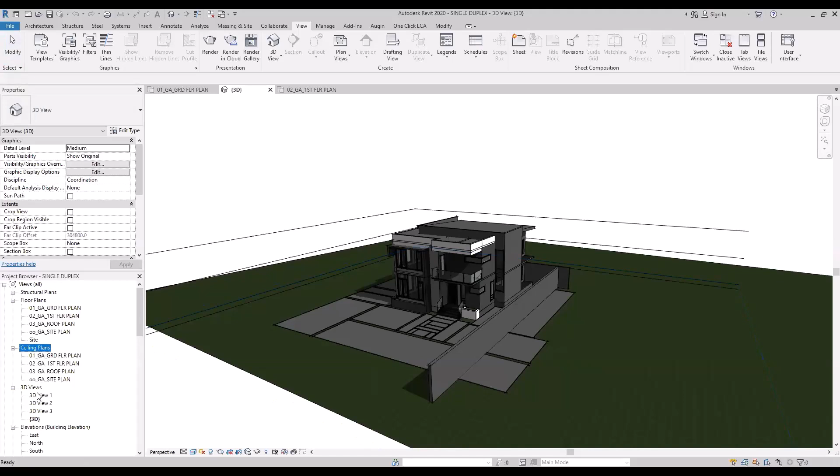So what I was saying before, this is your Revit platform here, and you have your 3D when you upload models on Revit. On your left hand panel, you have the project browser. On your project browser, you can see your floor plans, your ceiling plans, your 3D views, and your elevations, which are north, south, east, and west.

So just like we are familiar, we know that normally we always have different pages of drawings. This is just similar. So let's say I want to check on my ground floor right now. I'll double click on it, and I can zoom in and zoom out. I can see that this is the kitchen, which is 15 square meters, the bedrooms, the dining rooms. Same thing, I can do that for my first floor. So this gives me a basic knowledge about the drawings, which we are all familiar with.

Same thing about the roof. I can see my roof. And also I mentioned earlier on that if you want to check the 3D, there is this home button here, which is like a little house. You can toggle on it to check your 3D mode.

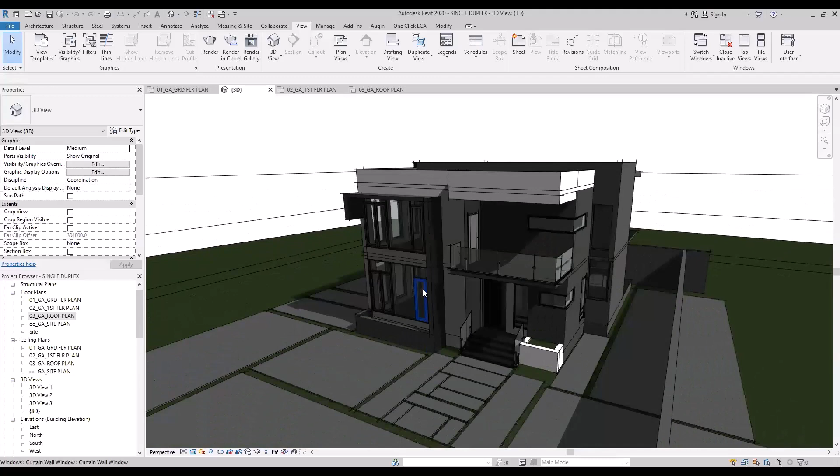And I also mentioned that if you want to check around your buildings and scroll in and scroll out, you can use your scroll button. And if you want to go around your buildings, you can always use your shift button and your scroll button to go around. So this gives you a proper view of your buildings.

Just let me check if there's any questions for now. Please go ahead. Okay, thank you.

Okay, so that is Revit in little terms. But sometimes when I'm doing MEP measurements, I always like to do it on Revit. So how can you do measurements? How can you do a little takeoff on Revit? Because I started using Revit for my takeoff before I was using Navisworks. It's not really a takeoff tool, but it helps in creating something called schedules.

No software, Revit or Navisworks, can prepare bills directly for you. They can help you get a major aspect of your bill of quantities, which is the quantities. Every consultant and contractor has their various rates, and anybody can defend their rate. But the thing that should be constant in any arbitration or case is the quantities, because length times breadth is still going to give us square meters.

So let's say I want to quickly get my schedules, my floor and wall areas from this model. It is easier than deducting corners, T junctions, openings and all those things, to avoid all that stress. That's why 3D helps you get your quantities faster. So let's say I want to get it right now.

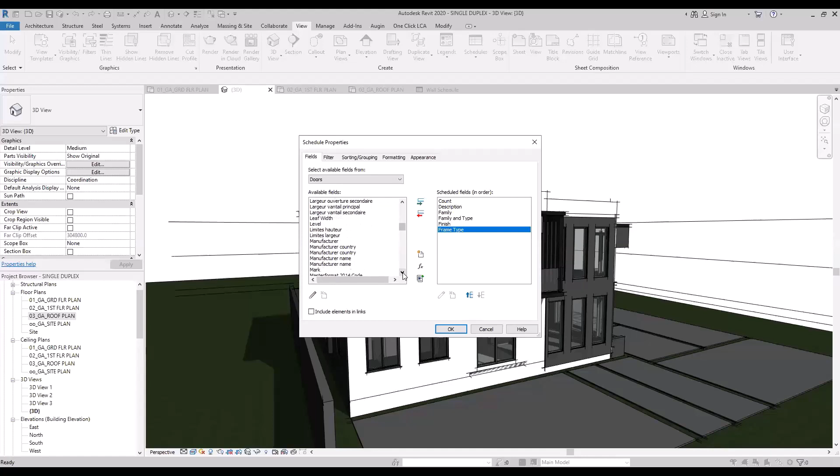Yeah, I'm looking for description. I'll be looking for the family and family type. So that is basic. And probably you have the finishes, depending on the level of development that is being given to you by the architectural teams. So let's say, okay, frame type, let's say if we have any. Okay, that's basically about that. So I'm not wasting much time. So let's click on OK here.

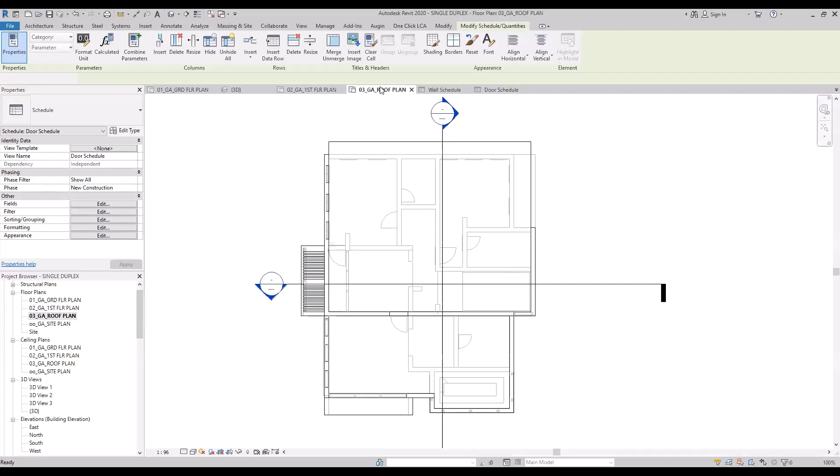So that's basically about how you can use Revit to get schedules out. But our focus here now is going to be Navisworks. And also if you want to convert Revit to Navisworks, you need to ensure whatever versions you are using, because of how Autodesk products work. If I'm using a 2021 version of software, and you as an architect gave me models of 2020, I'll be able to open it, which is okay. But if an architect is using 2021 and you as a QS are using Navisworks 2020, you will not be able to open it. So whenever you are trying to toggle between the two softwares, you need to have the same version of softwares.

So now let's just move to Navisworks. I've already opened Navisworks, and it's just a simple step. If you want to put new drawings, new models on your software, you just come to new here, just like Microsoft Word, come to open, and go to the location where you have any of your models. So we are using a simple model here, which is a proposed 2-bedroom flat. This was a real project in Lagos, actually. So you click on any of the models, and I can also share some of these free models at the end of this class for learning purposes. These are models I've been using for training for some time. It's free, actually. So you click on it, and you open directly.

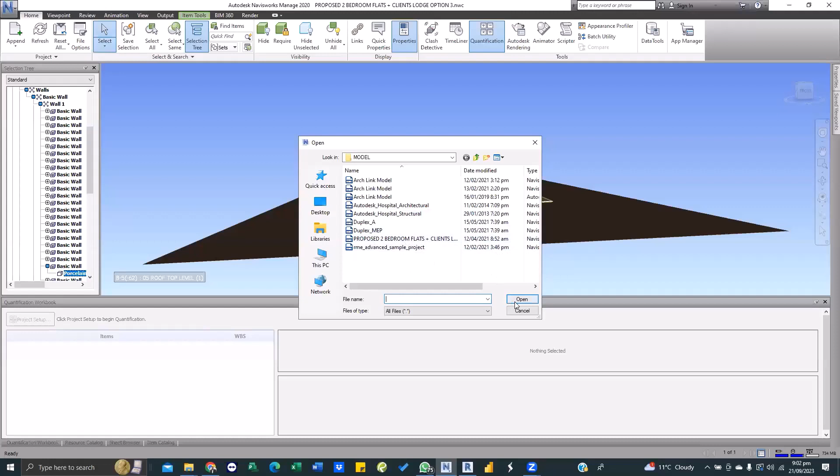I really appreciate it. Okay, so like I mentioned earlier on, this is Navisworks. When you want to open models on Navisworks, it's just like our normal Microsoft Word. Go to your home at the top left here, go to open. When you click on open, you can see a lot of models I have here. Actually, these are something that I've worked on. I can send some of these to you, like I mentioned earlier on. So this is a simple proposed 2 bedrooms. You click on it and click on open. It will bring a page like this for you.

So when you bring a page like this, one thing I like about Navisworks is it's more unique for measurement than Revit. So that's why it's very cool for quantity surveyors. So now on Navisworks, we have a lot of important panels for you, and we have a lot of less important panels here. So on this particular place here, this is the home, and under the home you have append, and on this append, probably you can be seeing something online they call in a BIM project.

In a BIM project, you can see something called federated models. This is where it all happens. Now this append function just means combining models together. When you run clash detections, you need to append your models together. Simply put, that means to join. When you join all those things together, it becomes a federated model. So you can always do that here.

Like I said earlier, we need to expand our mindsets, expand our horizon. Quantity surveyor does not just limit to residential and commercial. There's a lot of things we need to open our minds to in order for us to be internationally competitive wherever we find ourselves, because the world is more global and there's a need for us to expand our mindsets.

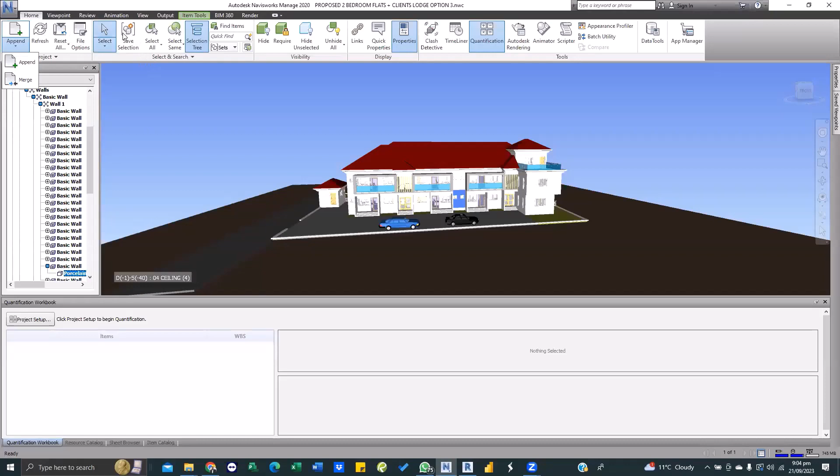So also I'll be talking about the major tools here that are very important for us. When you talk about select all here, and select same here, as time goes on you'll be saying if I want to just see all my walls alone, I don't want to see anything outside the walls, I can use this select.

Okay, someone is saying something. Okay, still the same thing, just want to be sure.

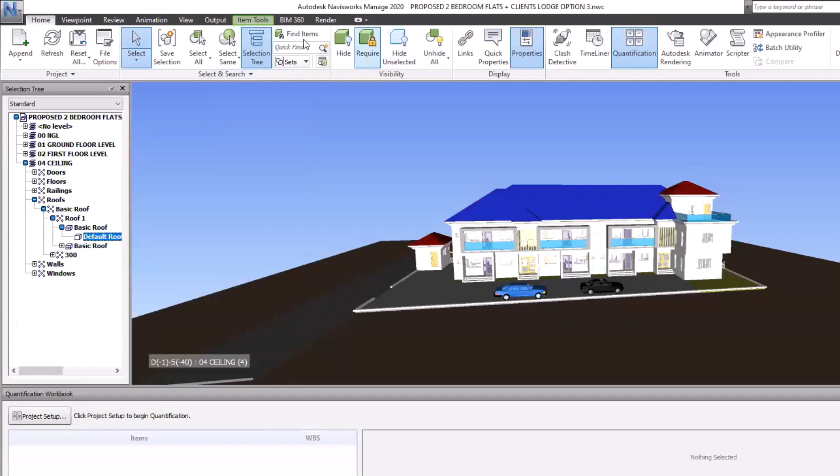So when you talk about select same here, for example, let's say I want to see my roof alone in this building. I can just click on this roof, select it, select everything about the roof, then hide unselected. So this is everything - this is my roof here. I can see this is how my roof is, these are my eaves. This is actually how my roof is alone.

So let's say, for example, you want to go back, you can say unhide all.

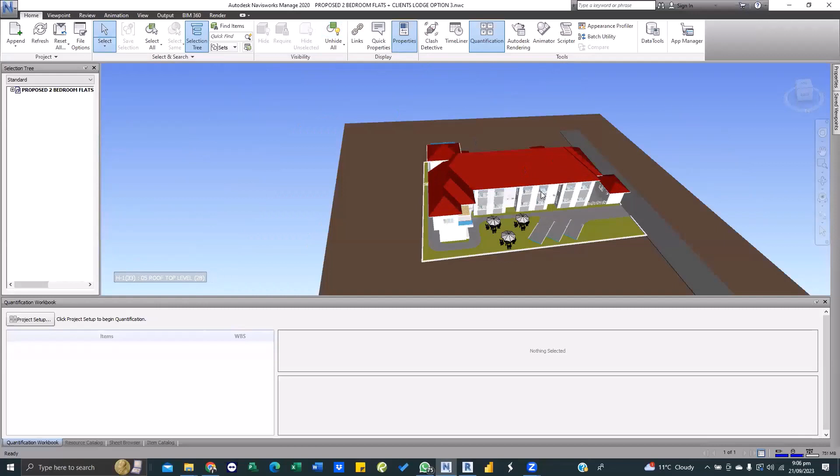Let's say, for example, I want to see my block wall alone on this particular building. So I can select one of them - you can see I'm only selecting one of the walls - and I say, okay, select same. That means select all the block here. So it's selecting all that type of block, which I think is the internal walls. So I can say select all, and I deselect it. So I can say that this is all my internal walls.

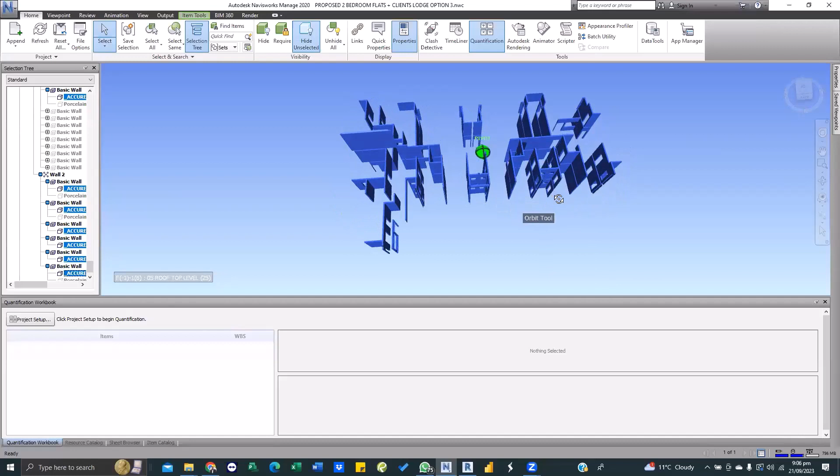This will be very useful to you when you are doing a large project, because no matter how you want to visualize your internal wall, you would not take your internal wall and your external wall together when you are doing your measurements. So that is the meaning of selecting, that is how that is.

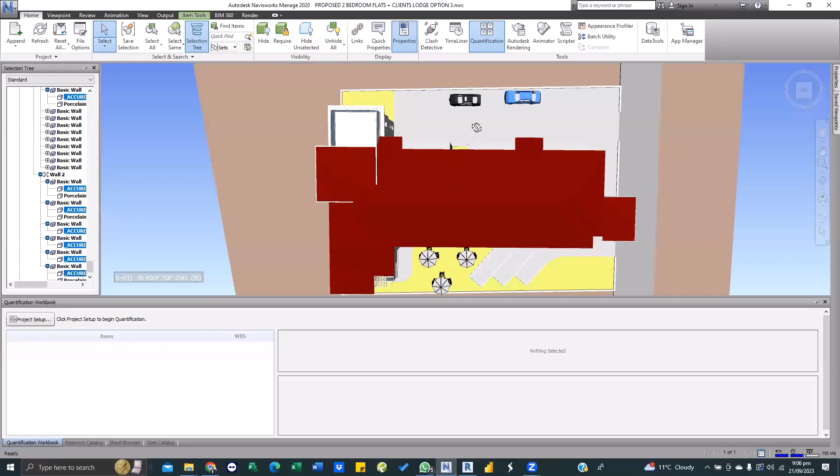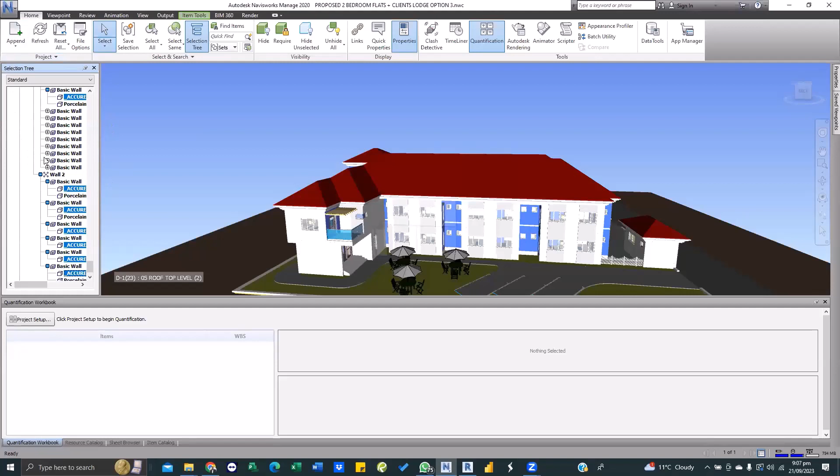Okay, now also selection tree - it is very, very important. As a quantity surveyor interested in using Navisworks, when you get a model, you need to first look at your selection tree, because this panel here is what they call the selection tree. And the more detailed your selection tree, the easier for your calculations, the easier for you to understand it. Let me expand this, let me close this.

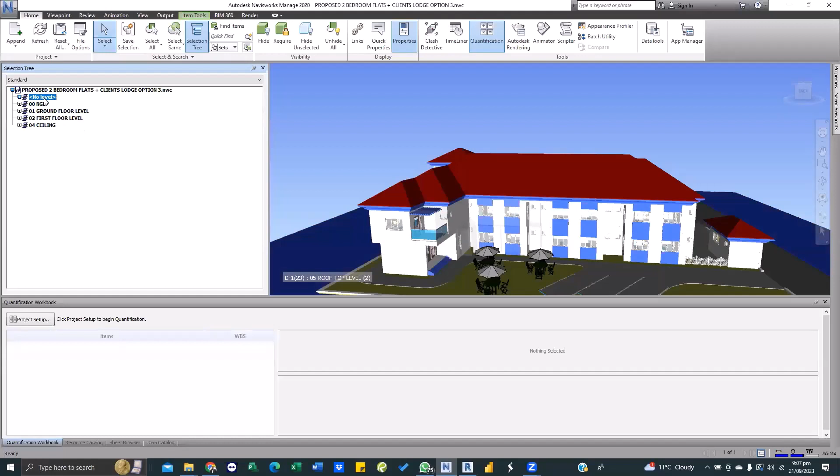Now you can see this is my root for my selection tree. I have proposed 2 bedrooms. I have some information on levels, on ground levels, on natural ground levels, on ground floor, on first floor, and on ceiling.

Now I always tell people that once I get models, I make sure I click on the levels. If, for example, I'm clicking on ceiling now and I'm seeing something highlighted in blue probably in the gatehouse, I know that probably when doing the design, those levels on Revit are not well done by the designers. I'm not a designer, so that is why a QS needs to prepare what they call a BIM execution plan. BIM execution plan is just like a document that shows what you'll be needing in order to execute your BIM project.

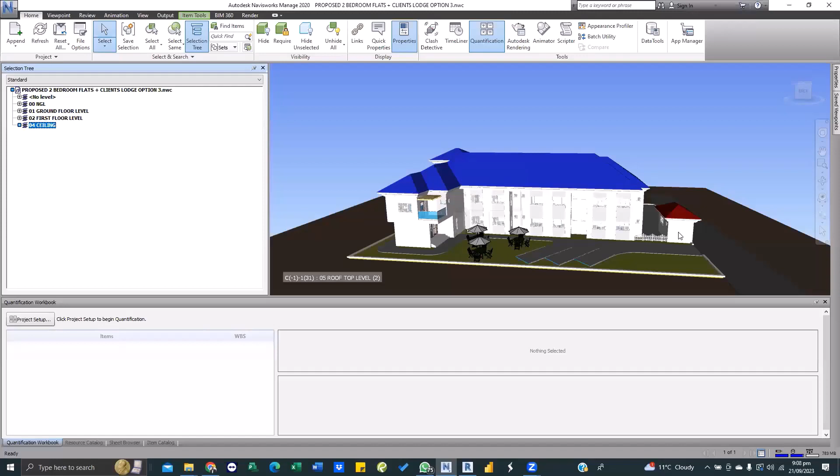Okay, so now looking at this, when I click on my ground floor, you can see everything that is on this ground floor is highlighted blue.

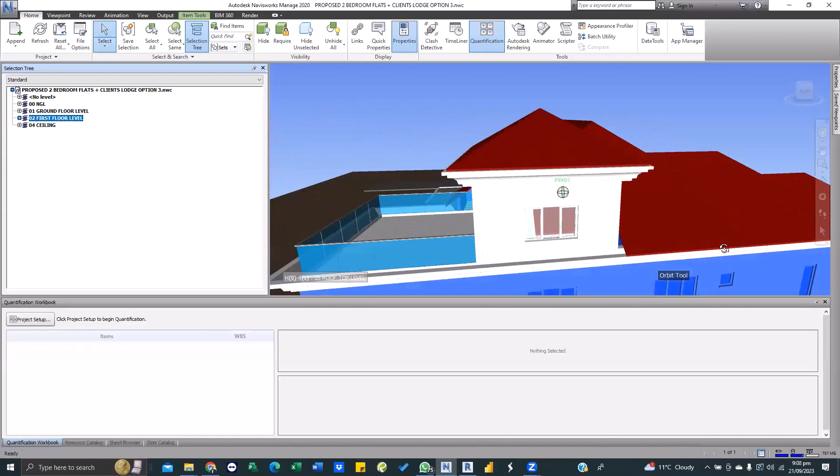So when I click on first floor, everything on this first floor is blue, except these features here. But everything here is actually on first floor, which makes sense to me, because when you are doing 4D scheduling, you'll be needing this information to get your workflow easily sorted. So that is about your selection tree.

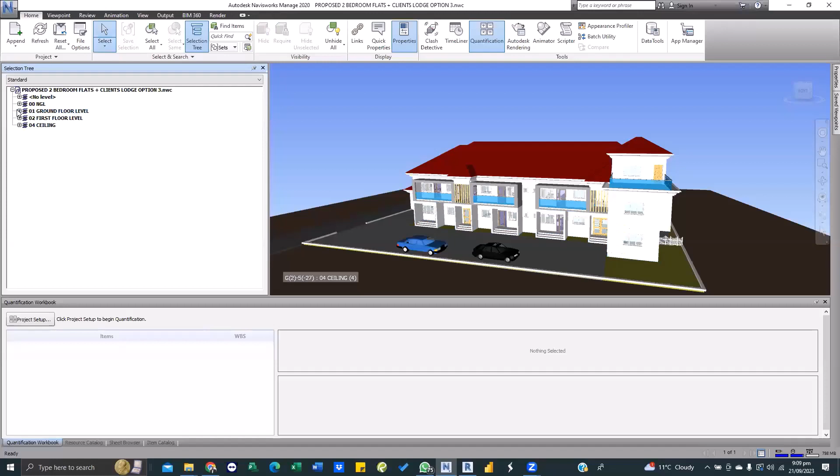You need to understand your selection tree very well. Let me expand this. Under this ground floor, you can see I have casework, doors, floors, furnitures, generic models, plumbings, walls, and likes. This shows me the components of every item on that particular ground floor. Sometimes there's an item on the first floor that won't be on the second floor, and that's how it is, very obvious.

Also, let's say I want to check more on my doors, let me see what type of doors I'm using here. I can see single external trad doors, single exterior aluminum doors with side lights, aluminum doors 4 panels, internal single doors (INT single door), and double external doors. So these are the types of doors in this particular building as designed by the architect.

Let's say I want to check what is on my floor. Expand. Okay, I have about 450 - they name it a 450 floor, but probably the thickness of that particular floor is 450 on the ground floor, based on the specifications.

So also I can check on my rooms. This is like the room tag on Revit that you saw earlier on. You can see kitchen, stores, and the likes. This helps you when you are doing your finishes, because you need to know the total quantities for wet areas, total quantities for normal floor finishes, and you can decide what you are going to use based on the finishing schedules by the architect.

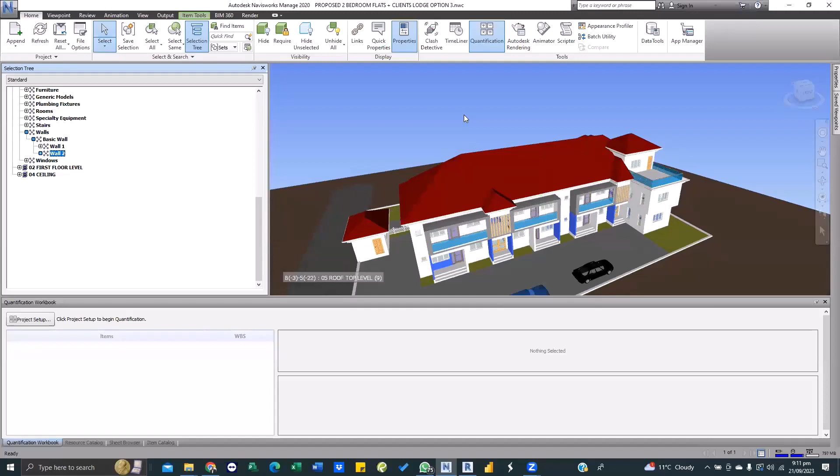So probably there's a staircase, there's a wall. Let's say on the wall, you can see I have a basic wall, another basic wall. When I expand it more, I have wall 1 and wall 2. If I click on wall 1, you can see wall 1 is named external walls here, all highlighted blue. When I click on wall 2, you can see all the internal walls here are wall 2 based on this design.

The selection tree is very, very important because it guides you in how you are going to be doing your measurements.

Is there any questions for now? Can I move on? Are we progressing? Are we following? Are we enjoying the class? Am I making sense? No, we are with you. Thank you. Okay, I think I will continue. Thank you for that.

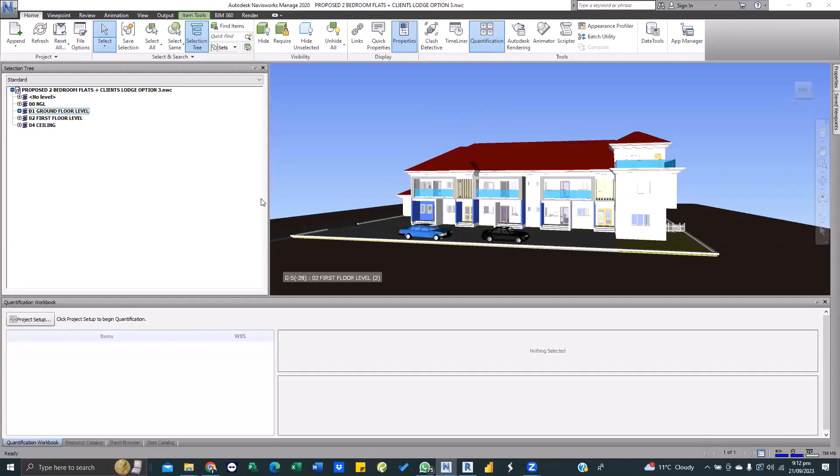So let me reduce this. Now, like I was mentioning earlier, I was explaining the selection tree here, and I've already used the hide and unhide button. Also, the next item here is clash detections - this is going to be our last item for the class, and we are going to be using that. The TimeLiner is for 4D schedules, and this is the quantification.

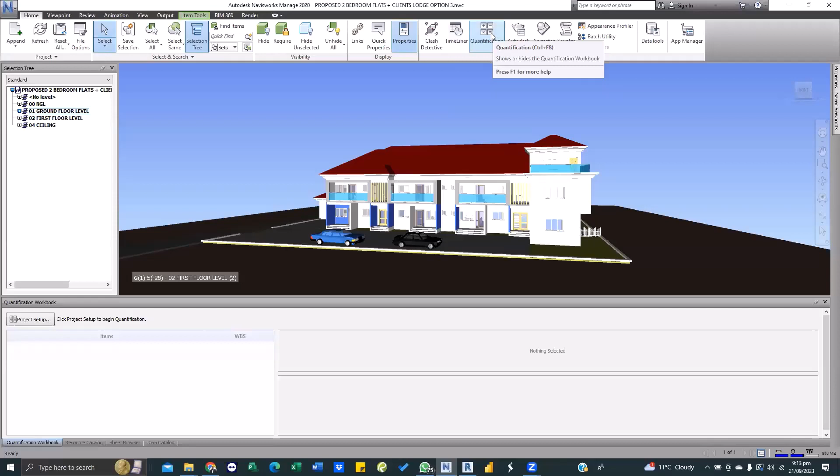So when you click on - let me reduce this, sorry, trying to reduce this.

So when you click on quantifications, this is where the major work is being done. It brings out this toolbar at the bottom. Under quantifications, we have about 3 to 4 major items: the quantification workbook, where all your takeoff comes to, and the resource catalog. The resource catalog is where you can tweak your measurements, because when you do measurements on Revit or Navisworks, nobody will model reinforcement for you, nobody will model formwork for you, and those things are very important. So on this resource catalog, this is where you'll be tweaking your measurements from.

So you can also say, okay, since the model will automatically generate the concrete for me, from that concrete element I can tweak it to get my reinforcement and my formwork depending on what I'm looking for.

Sheet Browser shows you your 2D plan and the likes, but I'll let you know how I work. When I want to check my Sheet Browser, I just go back to Revit and look at what I'm saying there, because it's more user friendly for me there.

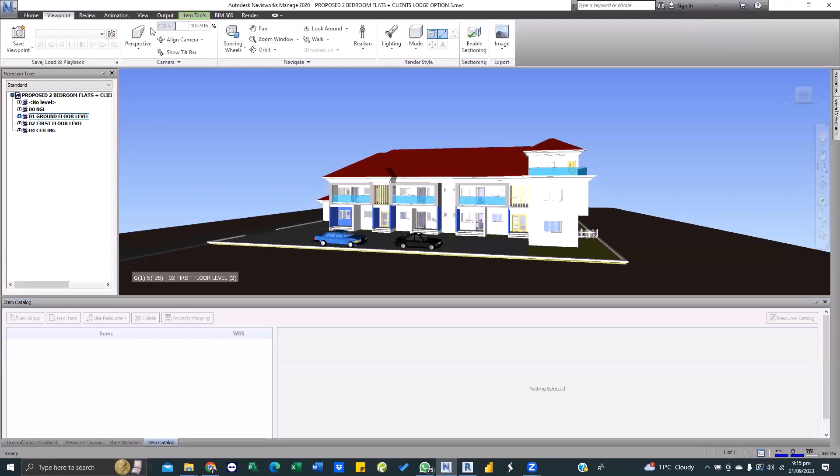So when it comes to viewpoint here, viewpoint is probably when you are not working alone, you are working with other construction and other professionals, and you want to mention some queries out. You want to do some queries, you can just take a snap picture and send it to whoever you really want to. We want to do that too.

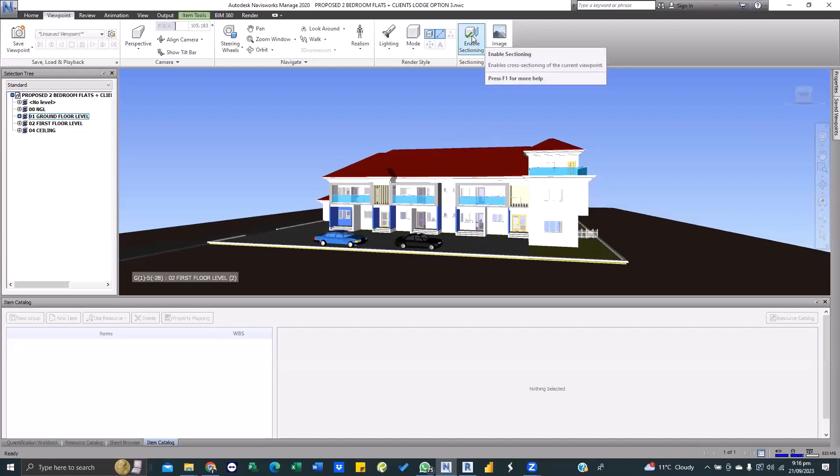These are other features that you can use to understand your models better. So probably you want to do sectioning, you can only section here on this software. Let's say I want to section here now. So you can see this is like a section of this particular building, depending on whatever you want to do, and you can always tweak it depending on.

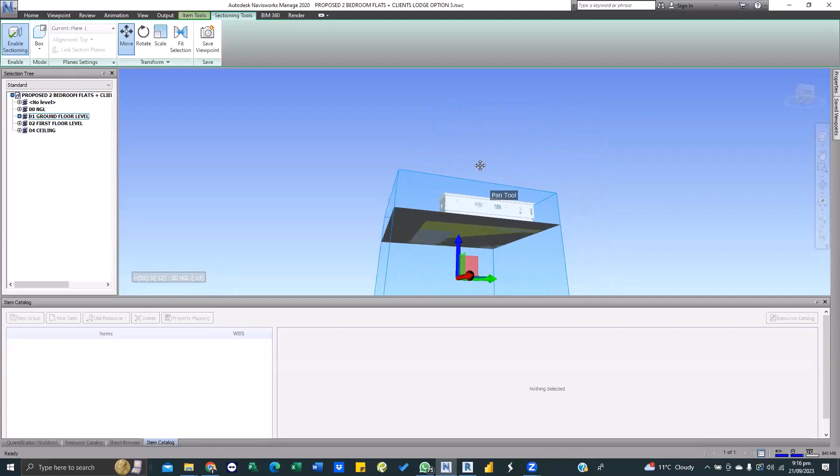Let's say I want to section from the top. I can see this depending on what you can do. All this information here, it is when you are using it that you see the usefulness, because there will be a time when you want to get further internal details in whatever you are doing.

So now the next item here is the review. We've talked about the home, we talked about the viewpoints, now we are on the review. Under this review, sometimes you just want to cross-check your measurement, because in any 2D software I use Bluebeam a lot back then.

Whenever I get Bluebeams and I want to work, the first thing you do there is to calibrate. Or probably some software like that, you need to calibrate first. But you see, on 3D, on Revit and Navisworks, there's nothing for you to calibrate, because the model is as per design. There's no need for scaling and the likes.

So sometimes you just want to check some things. Let's say I want to check some measurements. You can check some distance, some linear measurements. You can check some area measurement depending on what you can do. Let's say I just want to check the distance between two things.

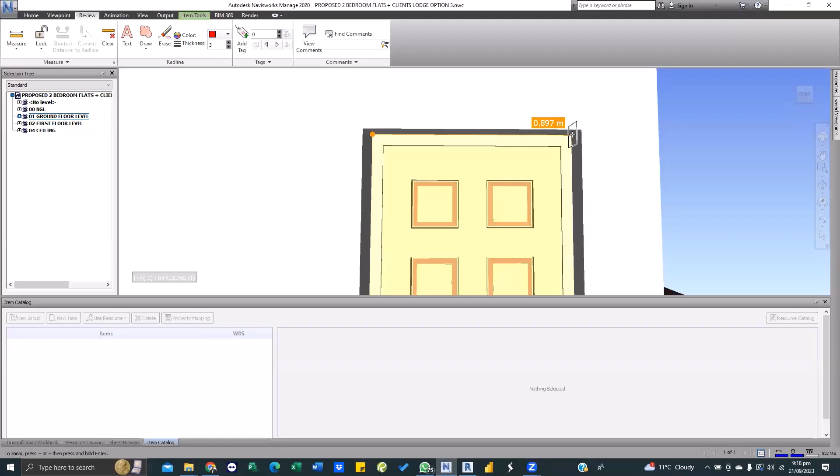Let's say I want to check what is going to be the width of this door right now. You can just click on that, zoom in a little bit. Put my cursor here and put my cursor here. So I can see that this door is almost about 900 width door, which is reasonable to me. So I can automatically understand that whatever measurement I'm doing here is correct.

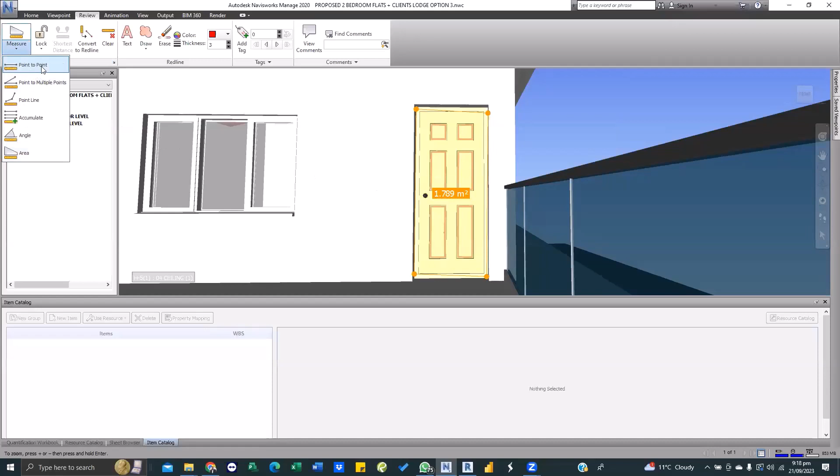So when you are done with that, you can do area measurement too. If you want to do area measurements, it's just like your normal something, you just pick around this and this. So 1.789, depending on whatever you want to do. This gives you understanding that whatever measurement I'm doing here is as per scale.

Because there will be some times that you will see some items that does not have properties. You can just do some on-screen confirmations or corrections, whatever you want to do. So this is animation. Animation is probably when you are doing advanced simulations, you can always use that. View here.

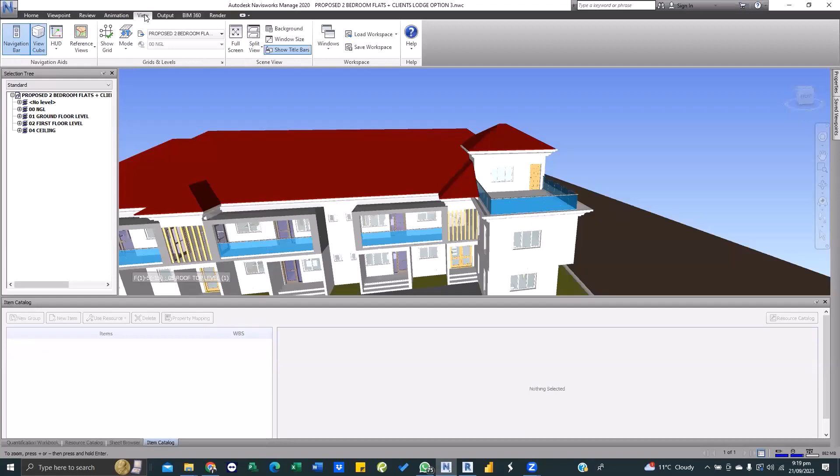Most of you, when you get your Navisworks, whenever you upload any drawings, any models, you are going to be seeing the grid lines. So you can see the grid lines as per the design. So these are the grid lines A, B, and the likes.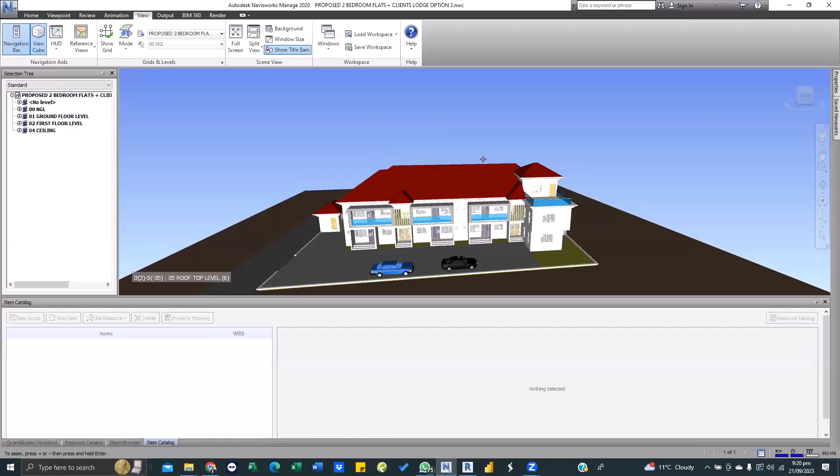So I don't usually like working when the grid line is there because it makes my work more dirty and not clean. So we just need to come under this View and toggle this back, to remove the Show Grid, because you might not necessarily need it here except you want to do some checks and the likes.

So Output, you might not really need all this one. BIM 360, probably if you are working in a collaborative environment, you can use all this one. So that's basically about the major items, the major toolbars on this Navisworks.

So now the next thing for us, okay, let's start our quantifications. Let's start our measurement right now. So when you start your measurement, you need to set up your project. This tool is going to come up. So what we need to do here now is to click on this Setup Project. Now when you click on Setup Project, this toolbar automatically comes up.

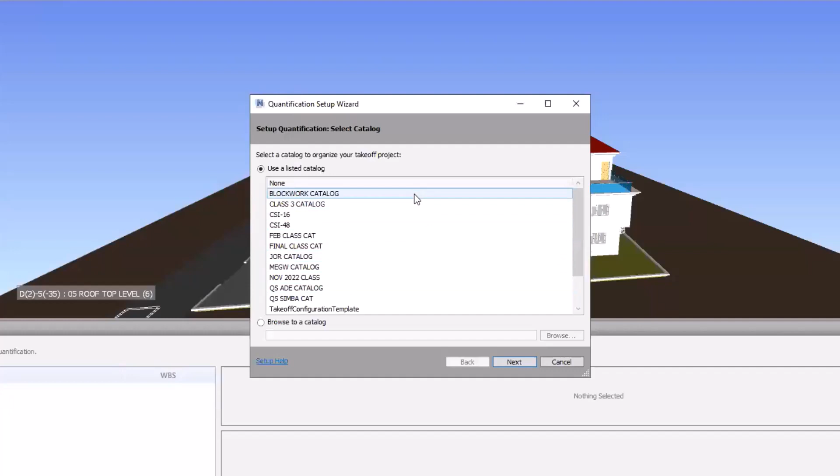So you can see on my screen I have block work catalog, class 3 catalog. These are based on the trainings I've done earlier in the past. But now, because this is a new class, we are going to be creating a new catalog for our work. Once you create a catalog for a duplex, you might not really need to create a catalog again when you are doing another project like a duplex.

But when you create a catalog for a commercial building, which is about 5 floors, 6 floors, and the likes, you might not necessarily need to do that again when you are doing a similar commercial project. So when you create a catalog once, it's okay. You might not need to do it again. So we're going to be learning how to create a catalog here. I'm going to be doing it now.

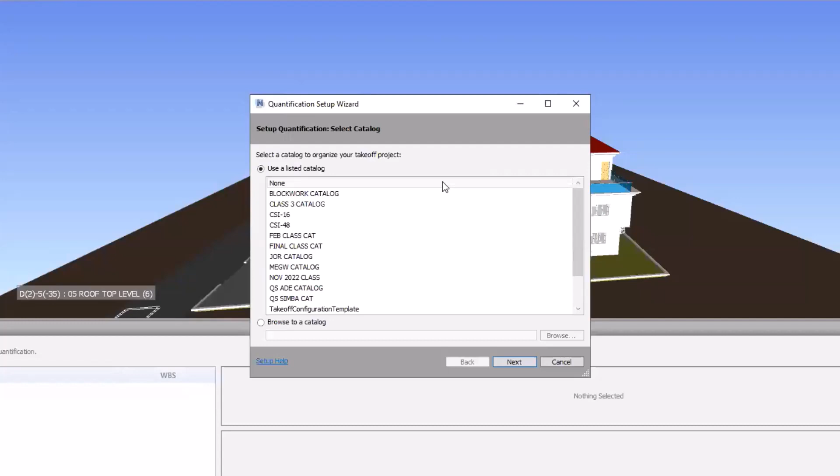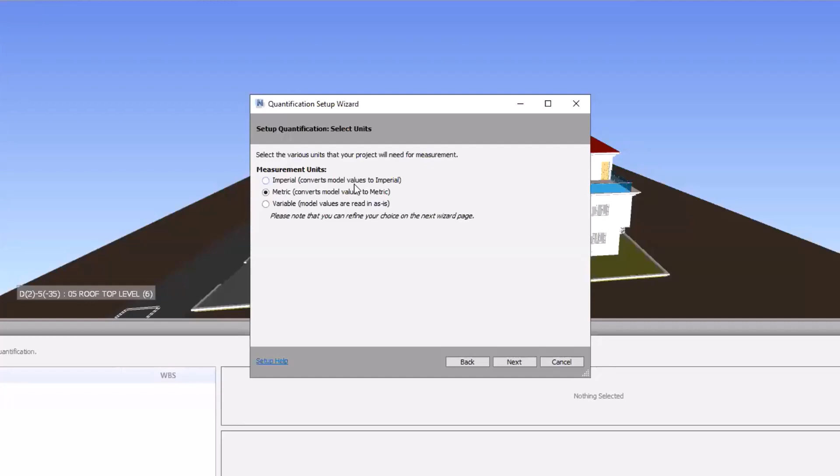So let's say I want to go from scratch now. I'm just starting, so I don't have any catalog here. I click on None. Next. So it's going to be asking us what unit of measurement it is: imperial, metric, and variable. In the Western world, especially in America, people use imperial. Majorly in Britain and Nigeria, we use metric. So we go ahead with the metric measurements. Okay, so we'll click on Next.

Now, I always advise people to just leave this as it is and just toggle on this last item, which is show metric and the likes. So you click on Next and you click on Finish. That is all about the setting up of a project on Navisworks. Okay, so now what am I going to measure?

Okay, can someone give me any item to measure? Please, I just need your inputs here. Okay, someone says, I would like to know if one can achieve all of what you have explained on ArchiCAD models when imported into Navisworks.

Well, I've not really used any models from ArchiCAD, but if ArchiCAD has an export to an external file extension that you can convert to what we call IFC, Navisworks can read IFC. So if you have a model and you get the external source converted to IFC, you can always use it on Navisworks.

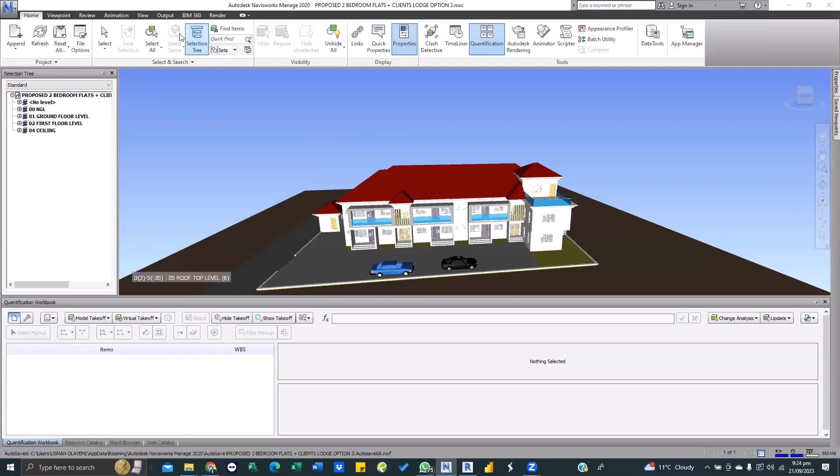Okay. Let me just choose one item to measure. Let's start from the basic. Let me remove this. Let me measure all my internal walls and my external walls in just one click. How can I do that?

I'll come to Item Catalog here. I'll come to New Group. So when I come to New Group, I'll type block work here. So when I come to block work, I'll click new group here. So you can see now I want to create block work, and I want to create

external and internal walls. Because internal and external walls are under block work, I will click on it and create a new group under that. But just imagine after typing block work, I click outside my box and click on New Group. It will not be under block work.

So you need to be careful here whenever you are creating either your main group or your subgroup. In simple terms, if you are creating a subgroup, you click on the main group first and click on new group. But if you want to start another new group, you just click outside the box and click on new group.

So now let's double click on this one. We are going to be creating external walls. So now I want to create another subgroup under my main group of block work. So what I need to do here is to click on block work, click on new group. It's going to be internal walls. Okay, so I've already created my main group and my subgroup here. I can delete this now.

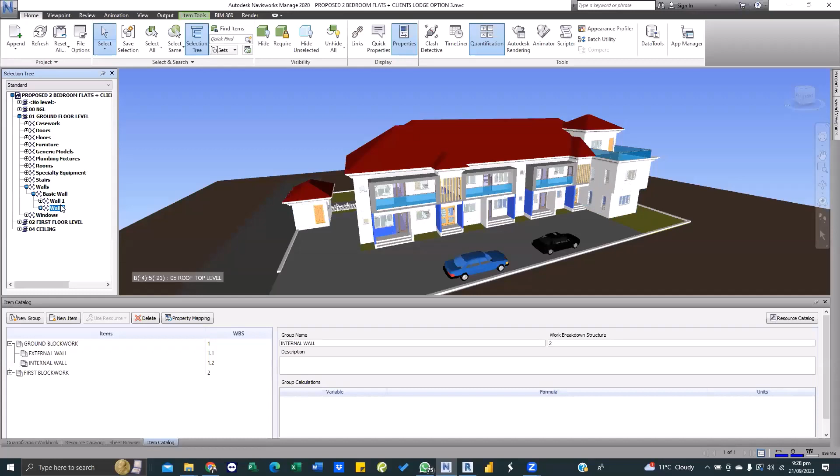Expand this. So I want to do my ground floor block work now, everything at once. So I'll come to my walls, expand. This might not be 100% correct in terms of the positioning. So let's agree that all wall one is external walls and all wall two is internal walls. So click on all wall one. There are two ways you can do these measurements. Either you drag and drop: come to my quantification here, come to my external wall here.

You can drag here. You can see I drag and drop under my external walls. Sometimes I don't like dragging and dropping because my hand might shake. So let's take up the internal walls right now. I will click on the wall 2 that I want to do, and I will ensure that I've clicked on my internal walls down here. So I will right click here.

So you put your mouse here, you right click, and you come to quantifications. You can see a lot of things here. You come to take off to internal walls. So just imagine I haven't clicked here. Let's say my cursor was here and I right click and I put take off to external wall. So wherever you want to drop it, ensure that you've already clicked on that item before you go to your selection tree, so that you don't misinterpret your models.

So let's right click here, quantifications, to internal walls. So I've automatically taken off all my walls on my ground floor. The good thing about this is that all walls are taken care of, and all areas have been deducted. This is the building height, 3 meters. What you need to focus on is the area here. It will give you some information you might not necessarily need, which is the volume. You need the wall area here.

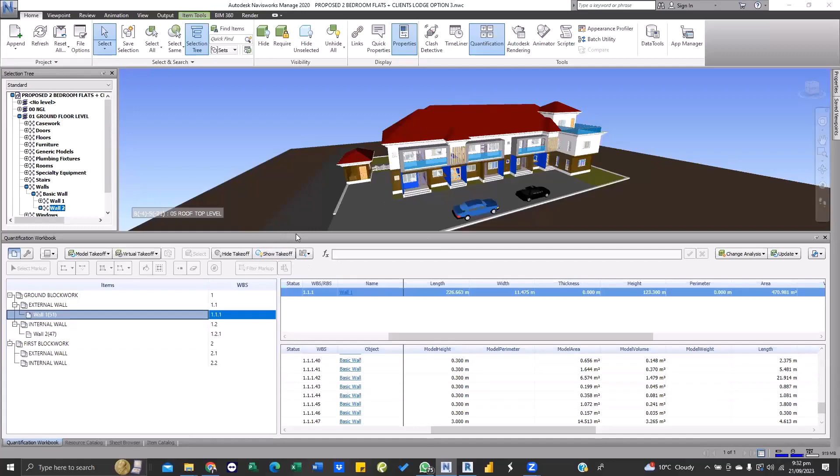For all my external walls it is 470.98 square meters, noting that all openings, doors and windows, have been deducted automatically. That is how we can do it. Okay, so we have done the ground floor, so now let's do the first floor. So we come here, let's collapse this back. We want to do external wall for first floor.

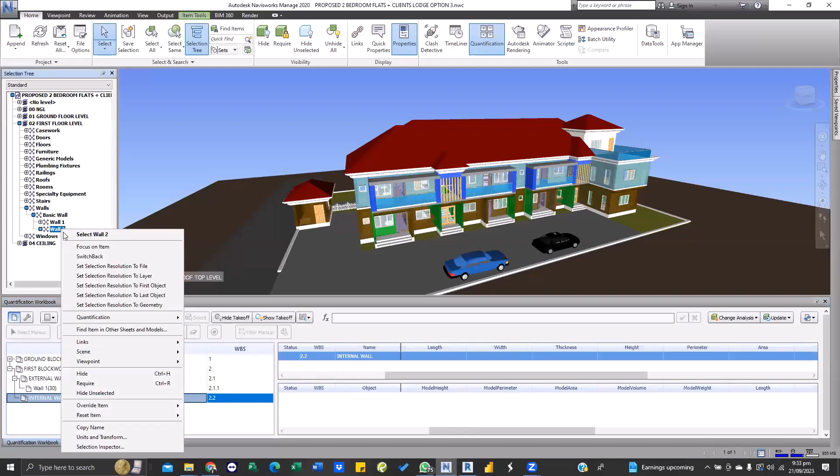So we go down to our first floor, go to walls, we go to basic walls. So wall 1 is all external walls. So right click, quantifications, take off to external walls. That is done. So come to internal walls, right click, quantifications, take off to internal walls. So this is how we do all measurements for our walls.

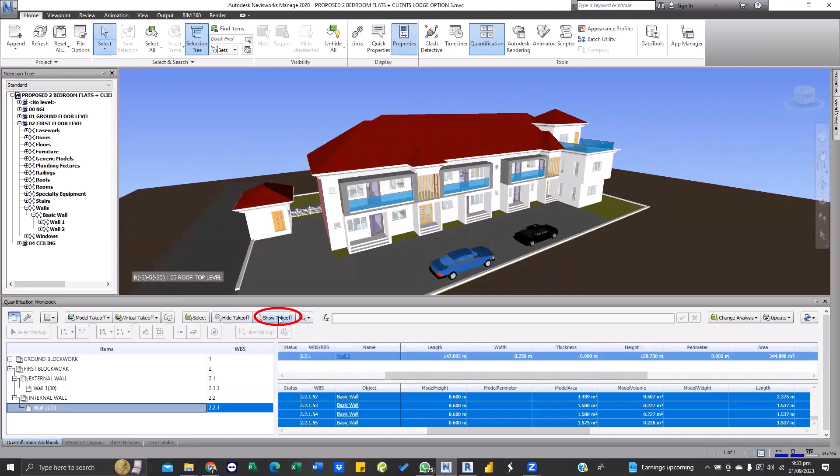Now the good thing about this software is that you can always see what you have measured and what you have not measured. So let's say you want to know if you have done all the walls right now, you want to see what you have not measured. You can just say show takeoff. This shows you that okay, I've done all these measurements entirely. So let's say I want to know what I've not taken off.

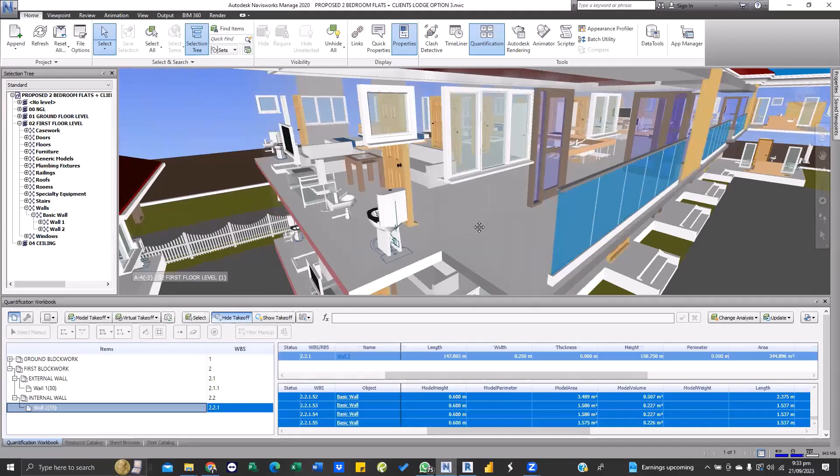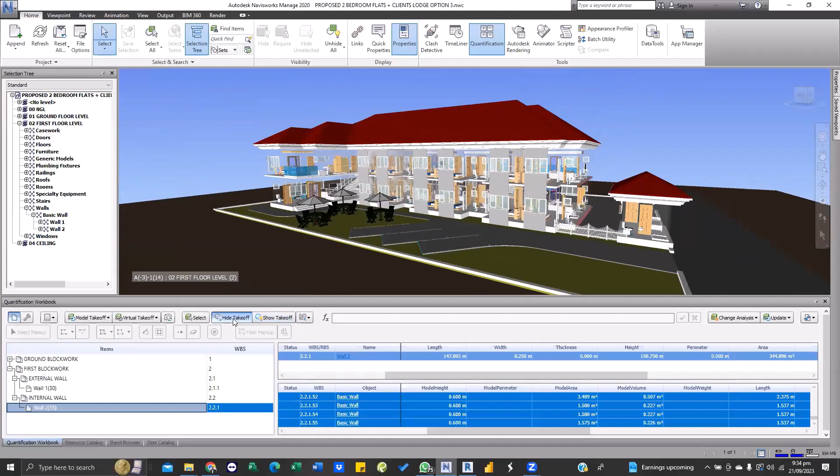You can say, I still have this pergola, I still have the railings, I still have the doors, I still have the MEPs and the like. So this is the interior aspect of the building. I still have my floor to measure. I still have my roof to measure and the like. So this shows you that I've done these measurements, I have not done this measurement. So this gives you full confidence of what is remaining and what is not remaining. So that's another good thing about this.

So let's do more measurements, because for tonight we are just going to be focusing on architectural models. For tomorrow, we're going to be focusing on structural models for us to understand it.

Please, before the class ends, I would also like someone to demonstrate what we've done so that I can know that at least one person is getting what we are doing, because that will make me understand that we are actually learning something. Please, if you feel that you are ready and you have your software with you, I would like you to volunteer so that it will be more interesting and more insightful.

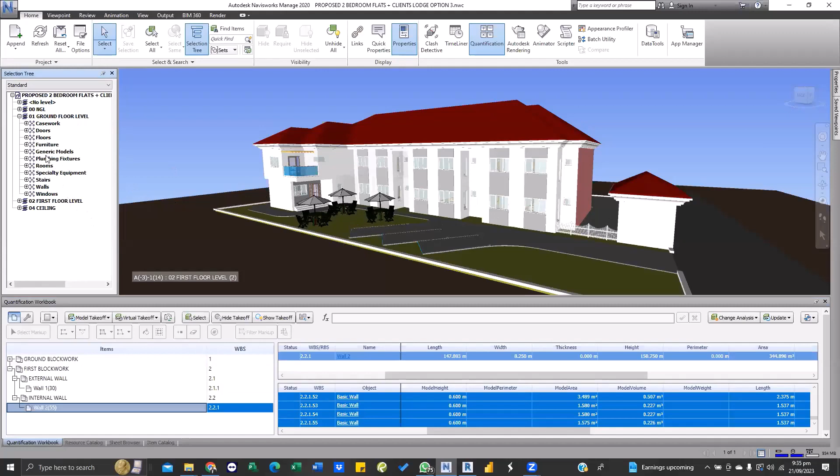Okay, so I will do some more measurements here. So let's say I want to do my floor measurements, my floor finishes here. So I come to my floor here. This is under my ground floor. So let me create under my item catalog. Under my item catalog, I come to new group here. I come to ground floor finish, and I'll create another one, which is first floor finish.

Okay, so let's do that. Just drop this ground floor, sorry. Just do this quantification, take off to first floor finishes, and under the first floor, you come here. Where's floor? Yeah, drag floor finishes. So let's take off for doors and windows.

So let's do all our doors at once. Is someone saying something on the Q&A? Okay, I think we are good.

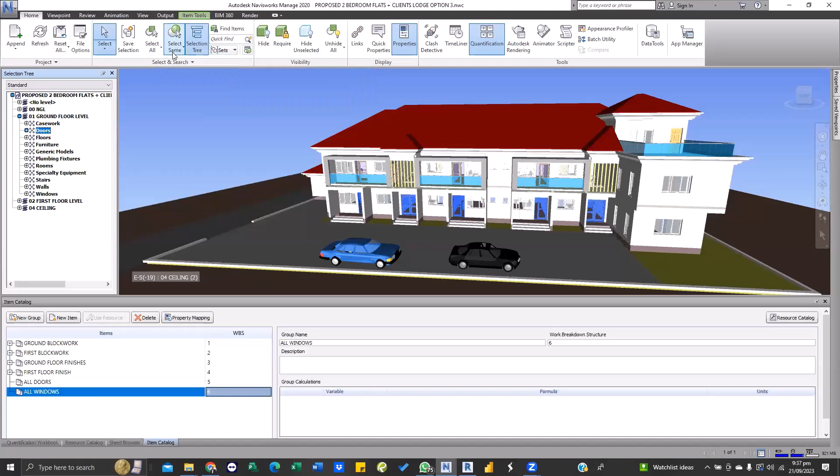You can see all the doors are being highlighted. So right click on it. Go to our doors. You can see it is highlighted on the ground floor, first floor, and the ceiling levels, that is the penthouse. So you can right click on any of it, take off to all doors. Okay, so let's do the same thing to our windows.

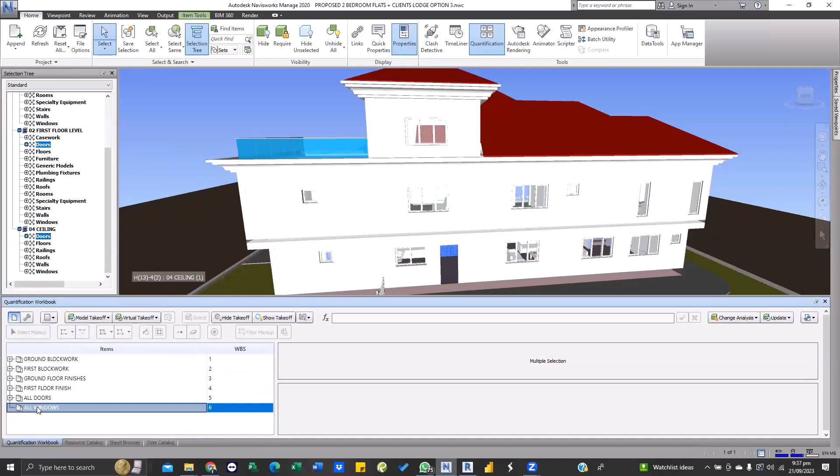You can collapse this, click on this back. So let's say windows, select all windows, select same name. So all windows are being selected. So you go to one of them, right click on any of them, quantifications, take off to all windows. So all your windows are being taken care of like that.

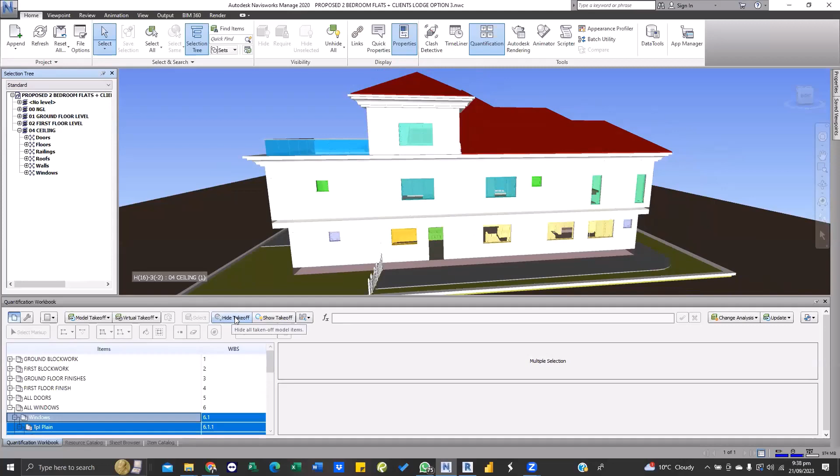So do you have any basic things that you want to take off again? Let me see what's not selected, not taken off. Okay, roof, yeah, I want to take off for the roof. Okay, so let's go to this. So let's create another group here. We have the roof covering.

You can see roof carcassing; they are not here because people rarely design for wooden roof carcass, but they design for structural steel carcass. I've worked on models that have structural steel carcass. All I needed to know was the length of my roof, the length of my carcass and the weight of it, and I converted it. So it depends on the models that you are working on.

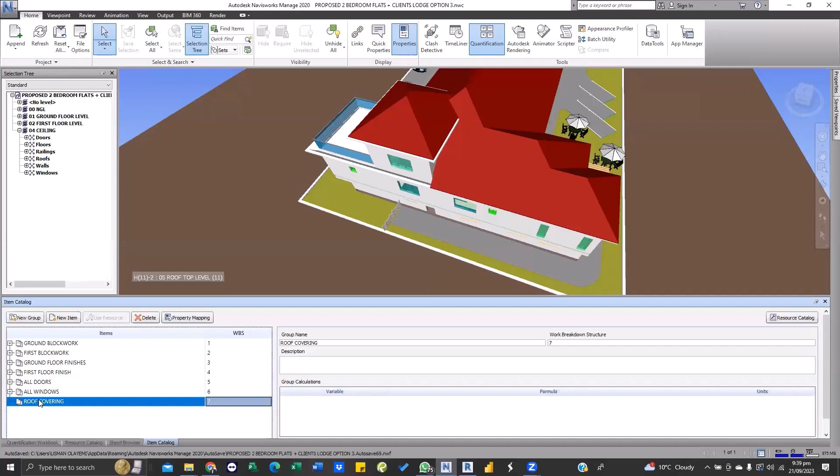So this is a roof covering. What I need to do here is go to my roof. I have my roof here, so right click on it. It can give me the area of my roof without different calculations. So I can see the area of that roof in particular is about 589, and it has taken note of the pitch and the different curvature there. It has taken care of that. So that is that for roof.

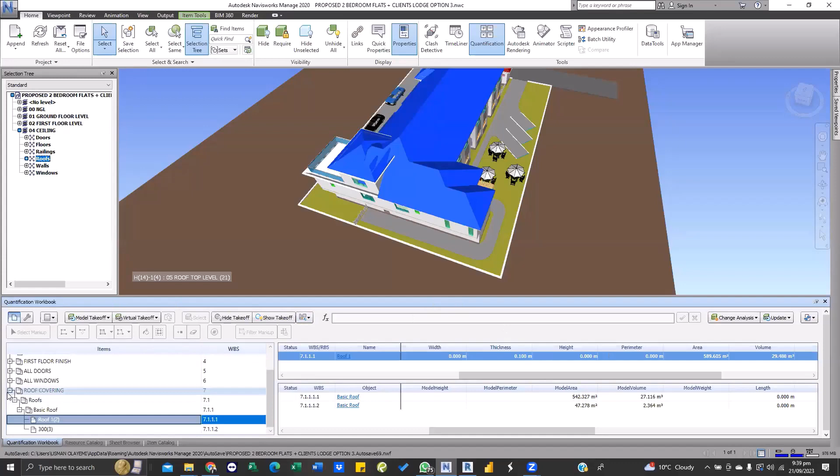Let's take off to see. Okay, I think we have some features. The roof for this gazebo, we didn't really take care of that. Okay, railings right now. We need to do railings. Let's say handrails, sorry. So I can click on it directly from here. This is railings.

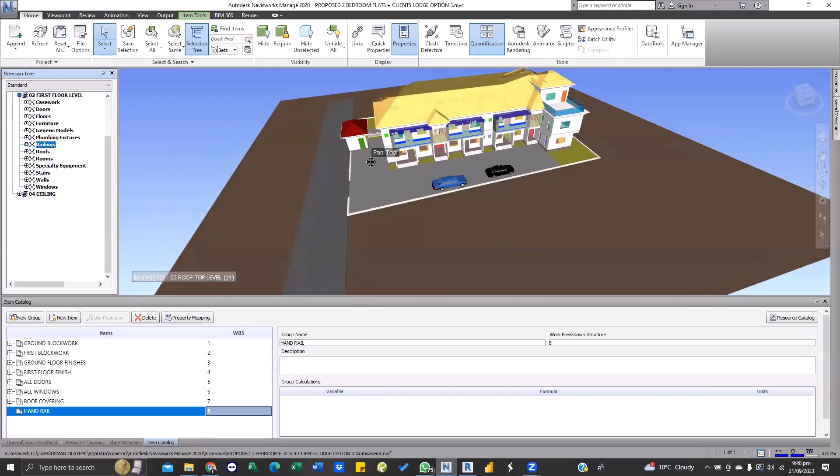So I can say railings here. Select all railings. Select same name, which is all railings. So you can see all the railings have been highlighted here. What I need to do is right click on one of them, quantifications and rails. So you can see this is the drag and drop you're doing, and your measurements are actually coming out.

So let's assume that is all about your architectural models, and we are going to be looking at structural models tomorrow. The important thing here is that we've done all your measurements. We now need to export it to Excel, because when I started using Navisworks, exporting to Excel always gave me a headache. But as time went on, I came to understand the sheets, because a lot of sheets will be generated. You need to understand the useful sheets and the not useful sheets.

So I just want to know, are we all good to this step? Please, if you want me to go over it again, let me know. My question is, is there a way that we can take your foundation using Navisworks? Because it says that we've worked with the internals and the external work. Okay, great questions. Are there any other questions? One person is raising his hand. Two attendees raising your hand. Okay, Amzat, you can ask your questions, please.

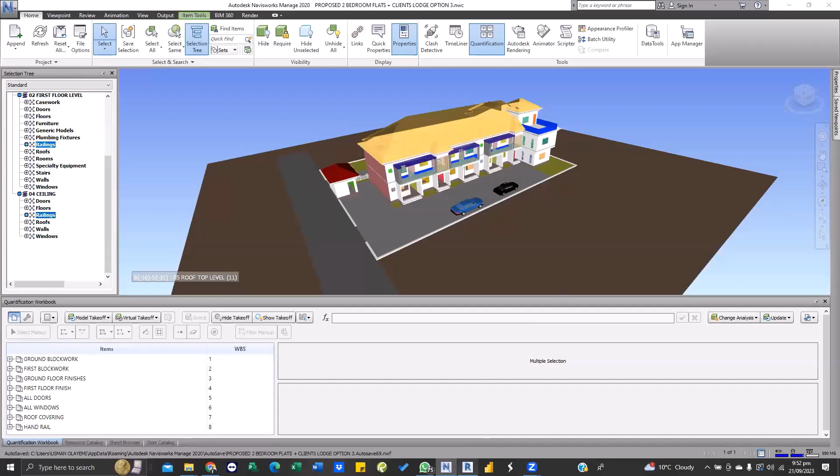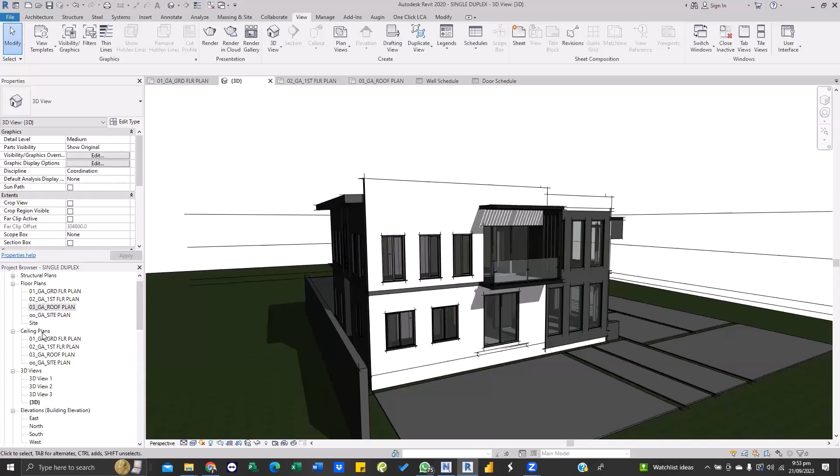Okay, so we started the class by having a basic understanding of, let me share my Revit. We started the class by understanding how we can use Revit for schedules and measurements, and we understand that on the project browser here, we can see the floor plans, the roof plans, the 3D, the elevations, and the sections as per the design. And we also practically understood some basic toolbars on Revit here.

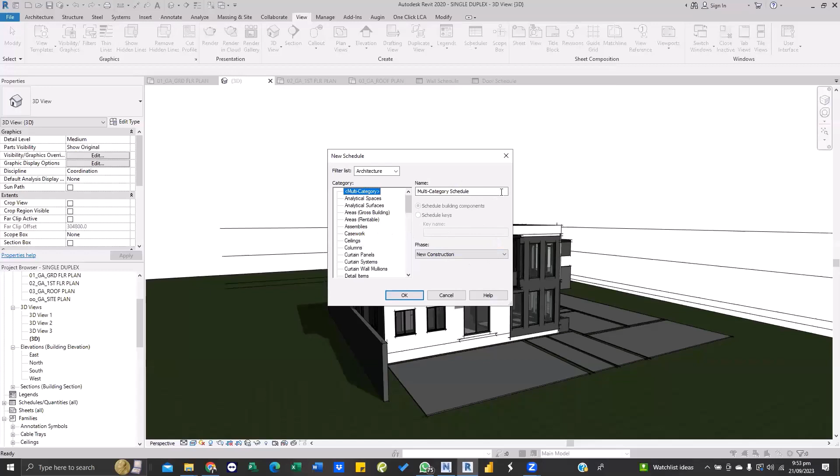And the major item which I wanted us to see on this Revit, sorry, let me just check something. Okay, is how we can use Revit to do some little schedules. Let's say you want to do some schedules, you come to schedules and quantities, you go to whatever you want to do, either wall, floor, ceiling, roof, or the likes. You click on it here, you just follow the instructions and your schedules will come out, which is going to be in this form.

And I also explained that we can always convert this to a text file, which is easily readable in Excel format. And that's all about how we can use simple Revit for schedules.

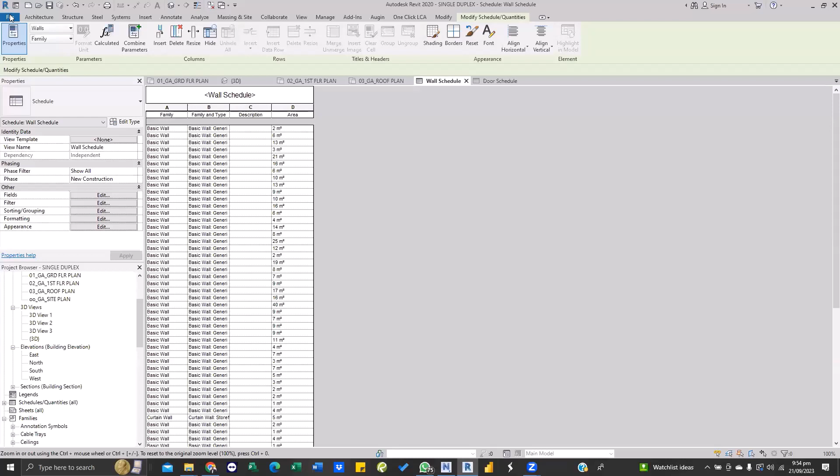And I also explained, I don't know if I mentioned that, because Navisworks and Revit are from the same company, Autodesk, it's easier for us to toggle between Revit and Navisworks. So let's say I want to convert this file now to Navisworks. What I just need to do is to come to file here, export here, you can see NWC.

So NWC is a Navisworks file. This is the IFC I talked about. If you are using other software and you want to open it on Navisworks or any BIM authoring tool, there's a need for you to have an IFC as a file extension. IFC means Industry Foundation Class, an international standard for any BIM modules or BIM files. So that is how you can convert it.

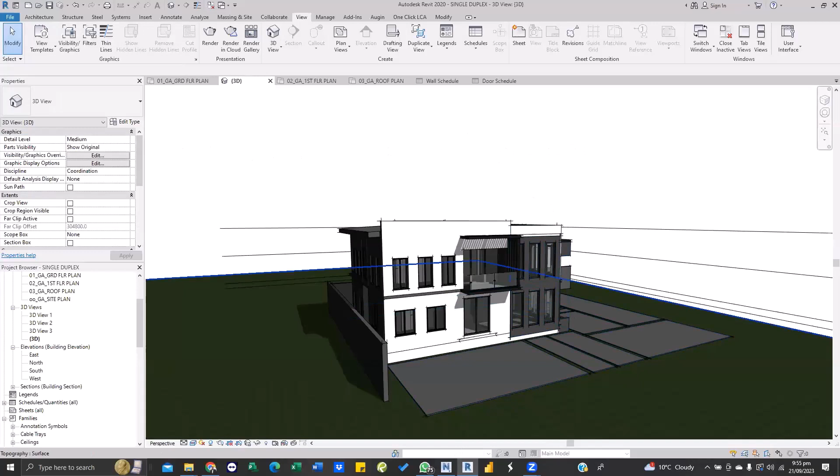So when you do that, you can basically go back to your Navisworks. Let me reduce this. I'll practically explain the major two here from the home tab. Under home, we have the major items: the selection tree, and select same, which we can use to get some information.

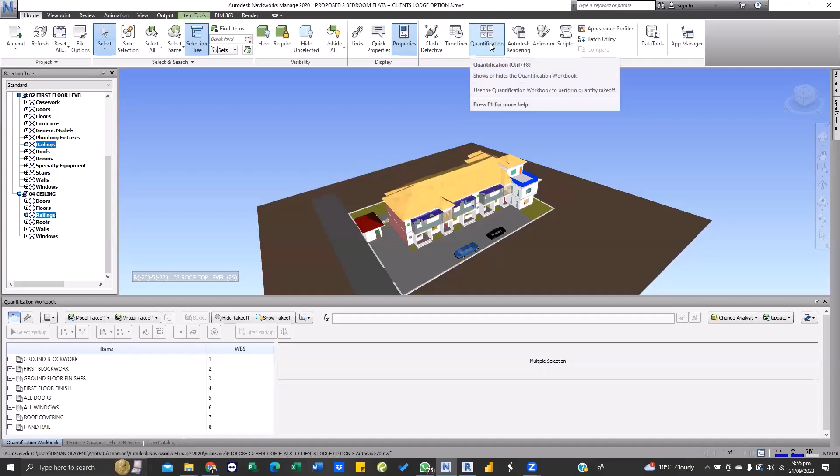We also have the clash detective, which I mentioned we're going to be looking at next time. We also look at quantifications, which is the major aspect of this training. And under review, we can see some measurements, on-screen measurement we can do here. Also, as I mentioned, that's basic animations, views, and the like.

Under the main aspect here, the quantification, we explained that for you to do a quantification, the first thing is for you to set up your project. And after setting up your project, you build something like a catalog.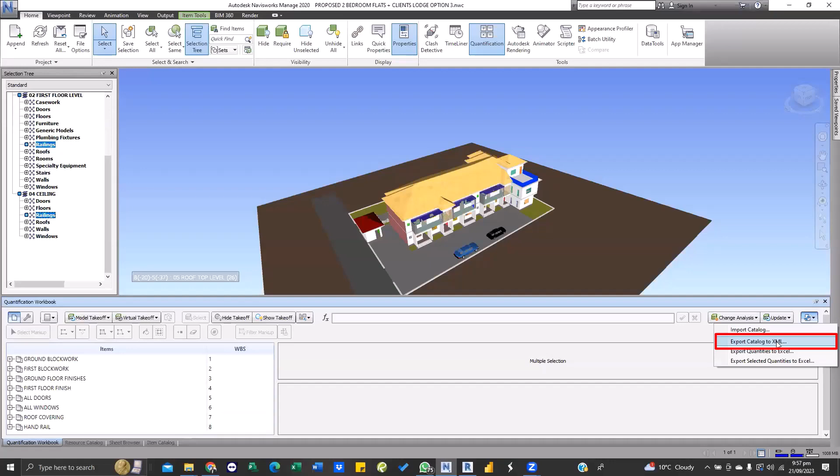Let's say, for example, now we've saved this catalog. I want to save this catalog. What I just need to do here is come here. You can see import catalog. If I have an existing catalog for a similar project, export catalog is for when I want to export this particular one because I want to use it on a next project. So I just need to click on it, export it, save it in a folder. Let's say this is a previous training, BIM training.

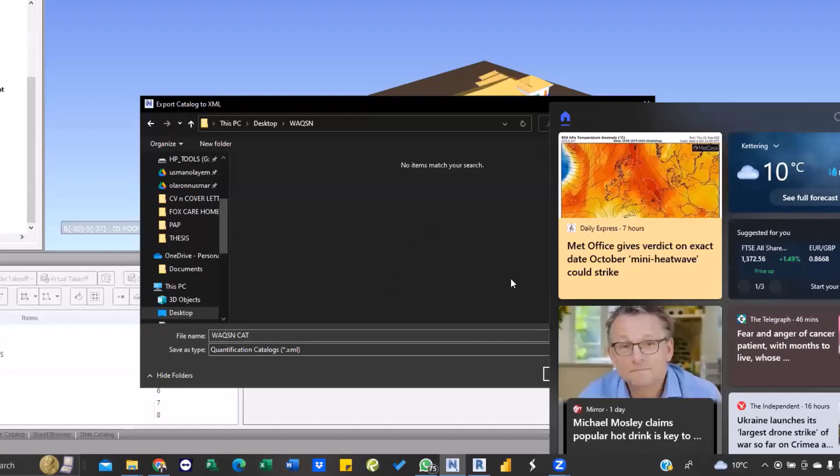Let's just say WAQSN, desktop, WAQSN catalog. So I save it there. Once I save it, I can now close this file, since we are going to reuse that probably in our next session, but we have already saved this particular catalog for future purposes.

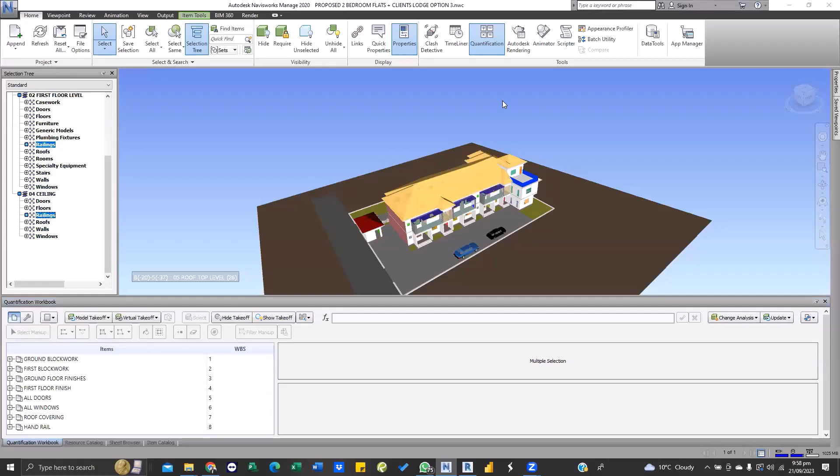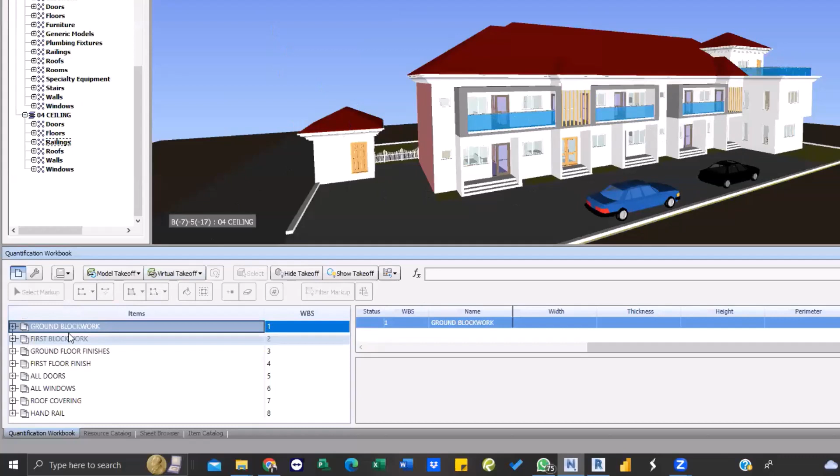Okay, so now let's say the block wall right now, let's do the ground block wall alone, ground floor block wall. So let's delete this. If I want to delete this, just click on this ground floor, delete. Are you sure? Yes. So let me do that again.

So I'll come to item catalog, create new. I'll say ground block wall. Under this ground block wall, I'll create external and internal. So I'll click on this again.

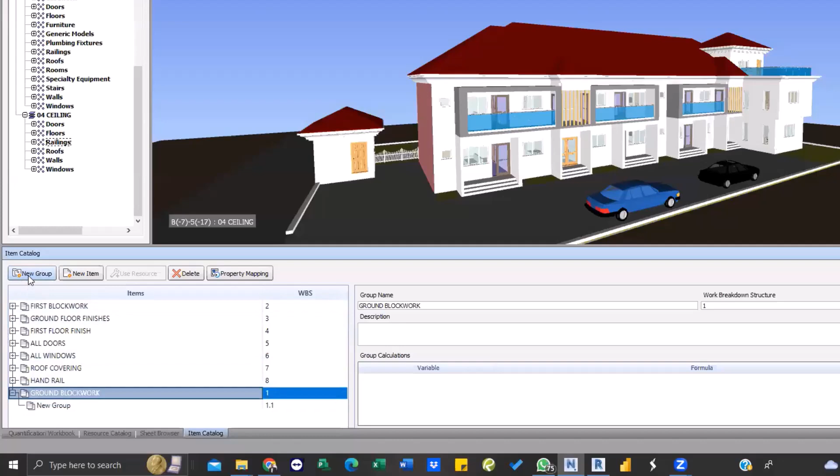No, continue. Okay, thank you. So here's my own. Okay, no, actually I'm following up. I thought that he's clicking directly since it's a subgroup. That's why I said no before I now saw that. Yes, okay, thank you so much, I really appreciate you following.

Okay, so under the ground floor, I'll click this new one. It's going to be external wall. So I'll double click on this. It's going to be internal wall.

Once I'm done with this, let me do the measurement right now. I'll go to where my block wall is on my ground floor block wall, and my ground floor block wall is here. So I'll go to ground floor, then go to walls base.

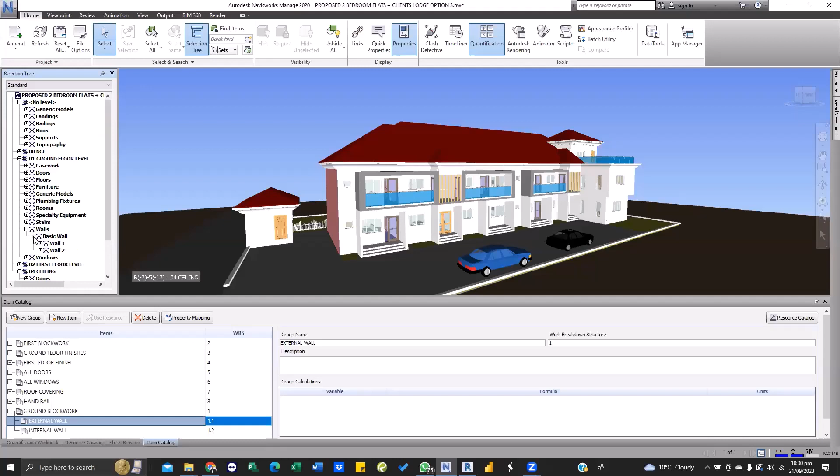Now, block wall 1 is an external wall, so I'll right click quantification. Okay, so come to internal wall 2, right click internal walls. Okay, so that's basically how we can do our measurements before we export to Excel.

Do we get the same approach again? Does it make sense again? The person that asked that we should go over it.

It's okay. Okay, thank you.

So for us to wrap up tonight, we're going to export to Excel. How do we export to Excel? It's just a simple analogy. You come here, export quantities to Excel. Now you can see it says export selected quantities to Excel and export quantities to Excel.

When you have export quantities to Excel, it's everything. When you have export selected quantities to Excel, it's just what you select. Let's say I want to export first floor finishes alone, that alone is going to be exported. But in this case I want everything. This is very useful - probably you've exported before and just did some other items. Instead of exporting everything again, you can just export that item alone and you're good to go.

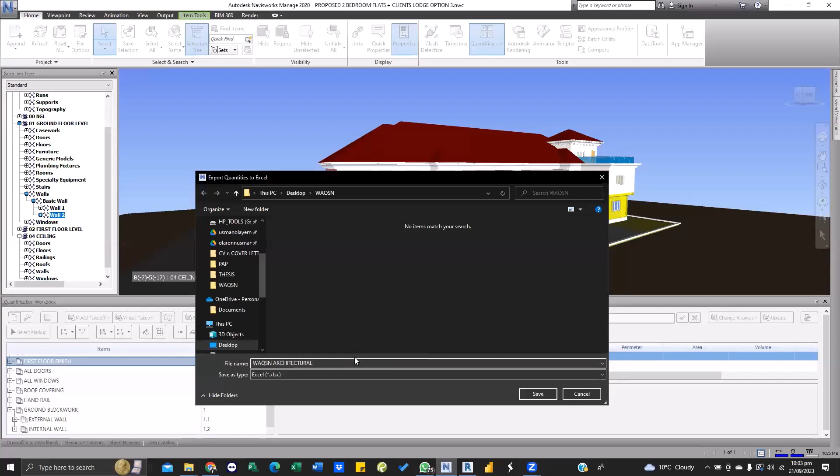So let me export everything right now - export quantities to Excel. Let's say WAQSN block work, no, WAQSN, architectural models. So it will ask you if you want to open it, so you click on yes.

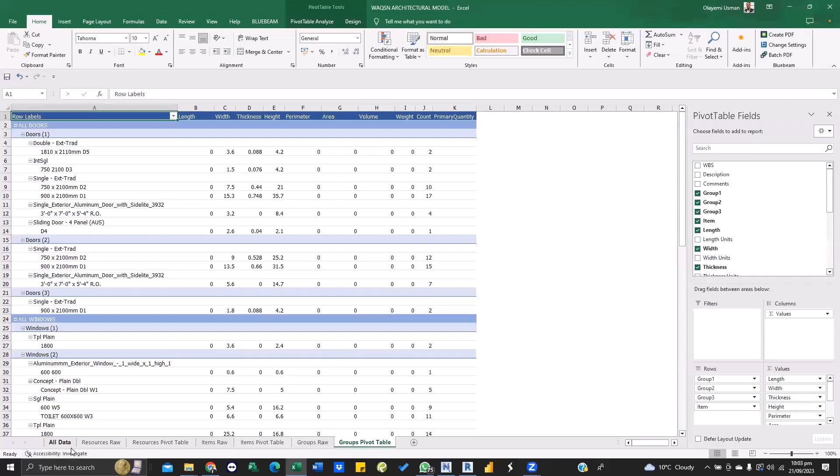Great, so now when you have this you might find it confusing when you export at first. You can see all data's resource pivot table, items raw, item pivot tables, group raws, and group pivot tables. The interpretation of this is that all data, as the name implies, includes all your groups and all your breakdowns. That's where you can have it.

So when I get measurements, I just come here, right click and hide. Now this resource raw - when we are doing structural models tomorrow, where we are adding reinforcement parameters and formwork parameters, your report is going to come to this page. This page is empty now because we have not added anything there. So what I need to do is come here and hide, and same thing here, come here and hide.

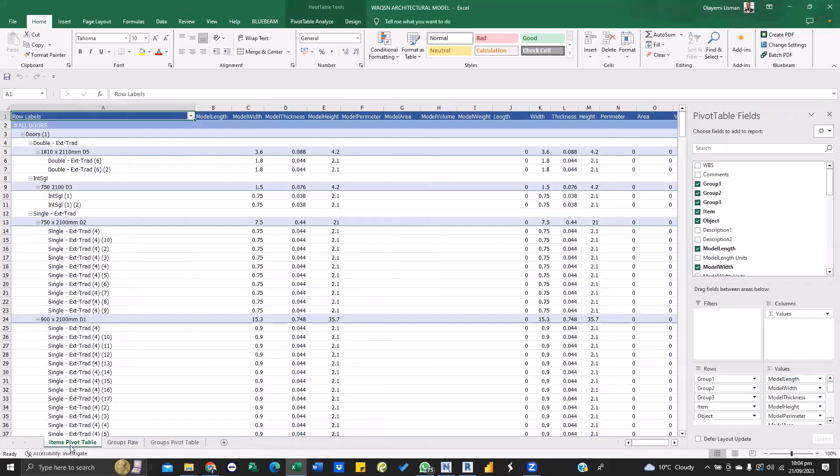Now item raw is like the breakdown of this group, so I don't usually use item raw table. I come here and hide, I come to pivot table also and hide. So the major table I use here is the group raw.

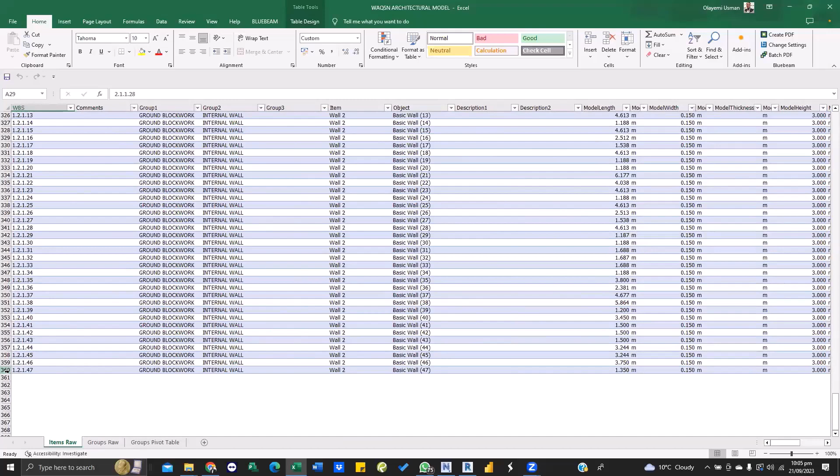Let me do something, let me unhide the item raw. You can see the total number of items on this sheet here is running to about 360 line items of data. But look at this group here, it's just 34. So the summary of this item is this group. I always advise persons to just use the group raw, which is easier for everybody to easily interpret.

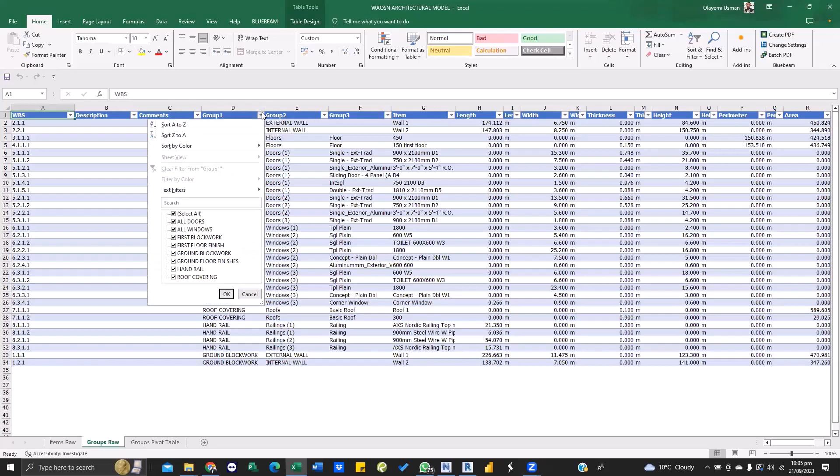So right now let me just say I want to get all my - you can see now, that is when your Excel skills come in, which is sorting and filtering. Let's say I want to get all my handrails linear meter. What I just need to do is come here, come to handrails, come to my length. So this here, my total length of handrails here is 97.18, and you can see we have different types of handrails.

So you can still filter down - we have by 900 steel wire pipe, and we have this Nordic top mounted handrail. So depending on what you are doing and you have your bill descriptions already, what you just need to do is put these quantities here underneath, 37.08 for this Nordic top rail, put it in your bills. Same thing here for the second one, that is 900 steel, you put it in your bill. That's how you can get your exact quantity out from Navisworks to your bill for your architectural models.

So it's similar to your structural model. Let's say you want to do your block work too, let's say on filter select - let's say it's your block work you want to do now. You just come to where's your ground floor block wall, first floor block wall. You want to get everything at once, so you can see you have external walls and internal walls. So you just need to say okay, filter by external walls. You can see, okay, this is all my external walls.

This is the area, where is it? So you can see your area here - this is the area of all my external walls, and you can do the same thing for your internal walls. You can see where is my total of my internal walls - so this is my total internal walls. Depending on how you break it down, either by 230 by 150, you can see the breakdown here, and the area for internal wall here is 692. So that's basically how you can do your quantifications of architectural models from Navisworks.